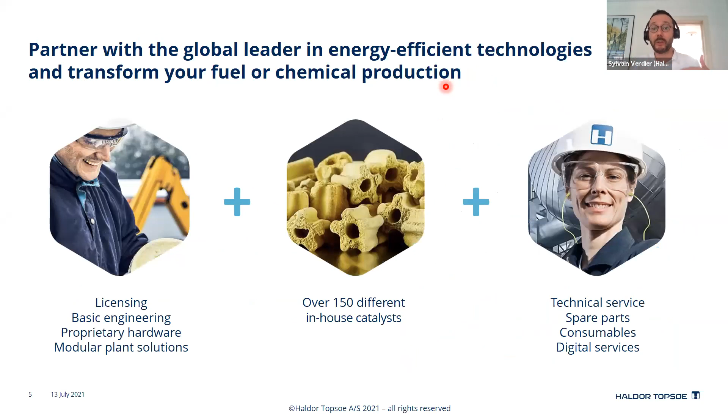And today we'll talk about one, which is how to produce biofuels. And we still have a lot of resources within R&D. Around 8% of our revenue is used for that. We do licensing, engineering, and so forth. A lot of catalysts.

Today we will talk about biofuels. Maybe we'll have another webinar at one point about hydrogen or green ammonia and methanol, all these other technologies and products we can help you with. But today, let's talk about biofuels.

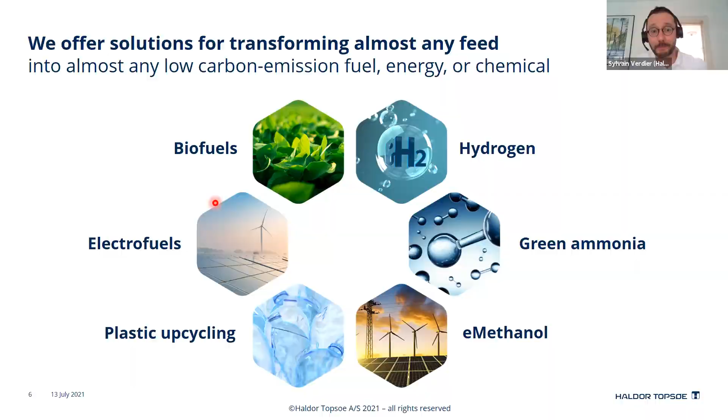If you're not familiar with biofuels, you will discover a whole world of acronyms and abbreviations. So I tried to summarize some of them to start with. You have what you might be familiar with, which is biodiesel or FAME, fatty acid methyl ester. You take, let's say, virgin oil, you do transesterification, and you get biodiesel. In Europe, you can blend up to 7%, depending on the country. You have different rules. Some countries like Brazil blend 20%, and some countries like Malaysia, Indonesia are talking about increasing to higher levels.

Then we have HVO or RD. HVO stands for hydrotreated vegetable oils. In Europe, that's how it's called normally. In the US, it's more called RD, renewable diesel. But let's say I'm using animal fat—will it still be called HVO? Yes, it will be. HVO is a generic name for when you hydrotreat or hydroprocess some fatty acid-based feedstock.

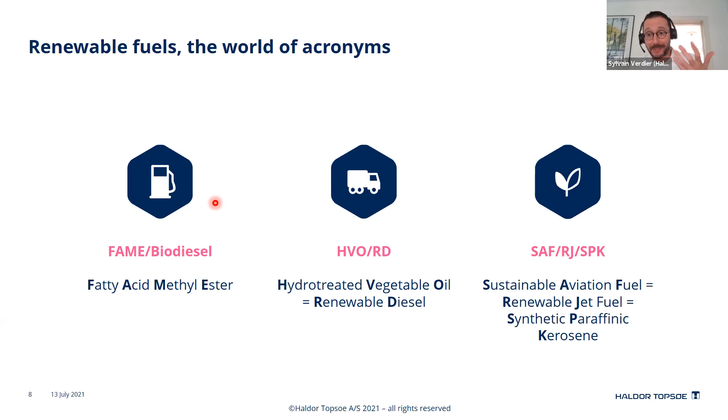The third set of acronyms we should look at is dedicated to jet fuel, renewable jet fuel. So one is SAF, Sustainable Aviation Fuels, RJ, Renewable Jet Fuel, and SPK for Synthetic Paraffinic Kerosene. I know it's a lot of abbreviations, but just wanted to start with this. For some people, HVO and biodiesel are the same. For us, it's quite different—one is a process of esterification, the other is due to hydroprocessing. So it's quite different conditions, hence different products. You might be familiar with this, but again, for those of you who are new to the world of biofuels.

For those of you who are experienced process engineers, you might think, okay, renewable fuels, it's a bit like fossil, I just need to process something else. It's actually a very different world. When I started, I worked about 10, 15 years on residue hydrocracking and so forth, so moving to renewable fuel was quite an interesting transition. The complexity is just different complexity. You not only have to look at technology, you have to look at the whole thing.

So the first thing is about feedstock, as I mentioned in the introduction. What is available, how much does it cost, where will it come from, and what is the quality, which is most important. You would get batches—maybe 50 tons or 10 tons or whatever you can buy—and each batch will differ. So can your unit process it? Will it make the same product? How will it affect the exotherm or hydrogen consumption in your unit? So that's quite different.

Conversion technology and cost: pre-treatment. A lot of these feedstocks contain contaminants such as phosphorus, silicon, chlorine from table salt, if it's used cooking oil, and so forth. So pretreatment will be needed. If you have a solid waste, you might want to transform it into a liquid, a biocrude, using pyrolysis or hydrothermal liquefaction, to name a few technologies. This is also a challenge. Hydroprocessing is important, hydrogen will be key, and CapEx, OpEx is obviously important.

The main challenge I see within renewable fuel is the whole market regulation world. We're moving toward a very regulated world in the EU for biofuels. EU, US, Canada, the UK - we spend so much time discussing legislation, blending mandates, greenhouse gas targets, because this is really what it's about. So as a process engineer, you might think it's not related to your work, but it actually will be. We spend a lot of time discussing this, not only with management or environmental engineers, but also with process engineers. It's really important.

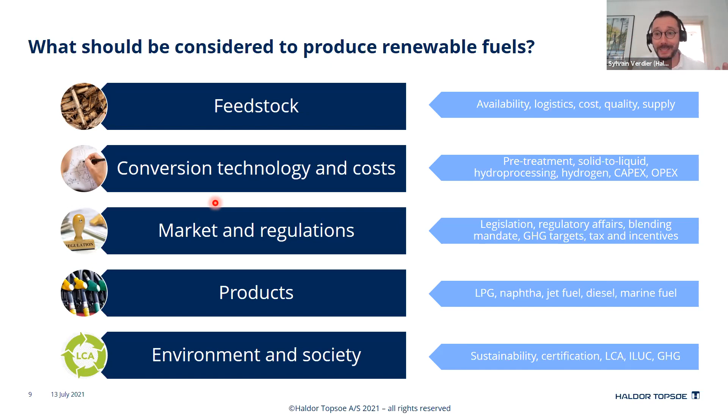So that was a quick introduction. Checking the time - so the agenda today, we'll talk about chemistry, as Fatima told you, challenges and solutions. Of course, we don't only want you to worry. A few words about sustainable aviation fuel, because the last couple of years was really about renewable diesel, especially in US and Europe, and now sustainable aviation fuel is really taking off. So I'll talk about that, then Q&A if time allows. If not, you can always write to me, or Fatima will follow up on the questions.

The main driving force, as Fatima said in the introduction, is mostly driven by legislation. So here I selected a few countries: RED 2 in Europe from 2021 to 2030, we had RED 1 from 2011 to 2020, RTFO in the UK, RFS at federal and state level in the US. Some states like California, Oregon, Washington State also have specific legislation on top of the RFS. Canada also has federal rules, and some states like British Columbia have something too. CORSIA for aviation - we're surrounded with legislation within biofuels. I will not bore you today about that, but that's really the main driving force behind it, and it's really important that every company looking into this masters it.

But let's talk about - we are chemical engineers, so this is what we should talk about today.

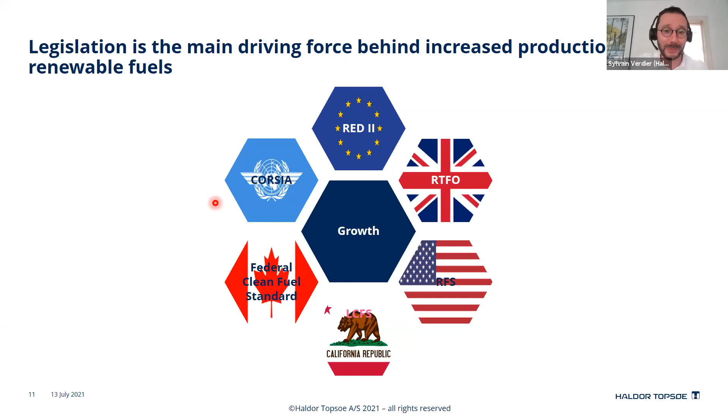In order to engage with you, we discussed with Fatima and decided we should do a few polls. So the first question I have for you: in EU 27, the 27 member states, what will be the share of renewable fuel in 2030? In 9 years from now, will it be 2%, 5%, 10%, 14%, or more than 20% with the current RED 2?

Fatima, I have a question for you while we wait, and I hope it's okay with you. Do you have a guess about what was the share in 2020 of renewable fuels in Europe? Are we talking about 5%? Yes? I live in the Middle East, so for me... I know, it's quite different. But okay, so I would guess it's still picking up. It has picked up, still picking up. So maybe between 5 and 10. Exactly. So, okay, spoiler alert for the answer, but we are around 10%, 9%, so it's average EU level. Some member states are below 5 actually, but some member states like Sweden, Finland, northern countries are much higher.

And it's binding for EU level, but not for each member state. So actually, okay.

And we can look at the answers. So right now, the target of the current RED 2 is 14% in 2030.

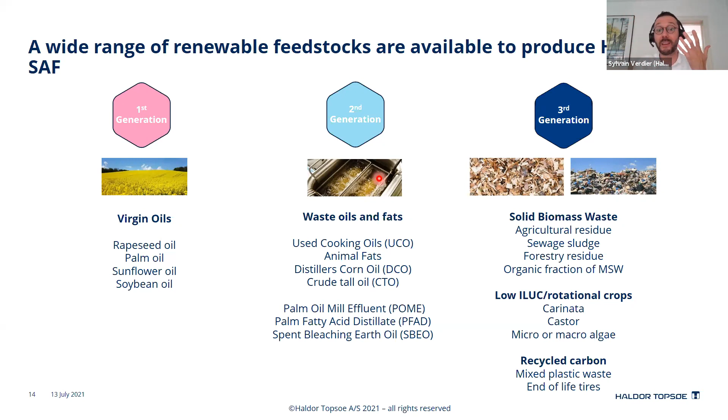So this is basically the feedstock you have, and they might have different chemistry, but we'll focus on virgin oil and waste oil and fats because they have very similar chemistry. Basically they mostly consist of triglycerides - you have a glycerol backbone, some oxygen, and then a long structure that looks like an alkane. We like alkanes or normal paraffins because this is what we have in fuels. Imagine you make diesel out of that - really high cetane number, cetane index, but very poor cold flow properties because it's quite high, maybe 26 degrees C, but it's really good.

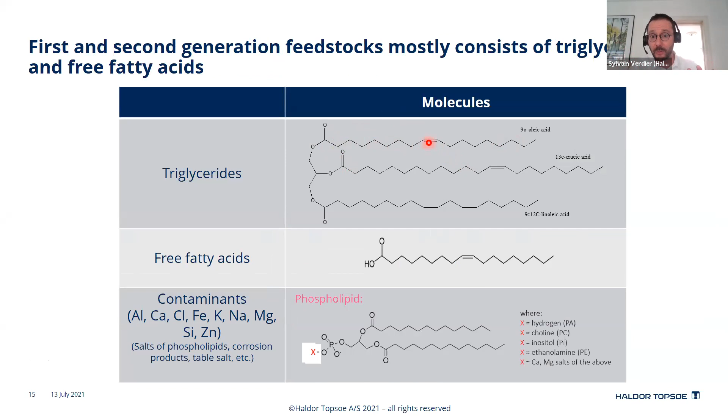Basically you look at your feed and say, okay, how many C16? This is 16 carbon, this is 18 maybe, and how many double bonds do I have? So here I have 1, 1, and 2. So when you buy your feedstock, you would get this type of fatty acid profile.

Let's say you have tallow, animal fat. Maybe you have 16 carbon with 0 double bonds, and you can have this amount, or maybe C18. It's actually quite interesting to know that because it will tell you what you will have in your product. If you make jet fuel, maybe you want more C16, it means less cracking. If you have more diesel, it's always in the diesel range.

But let's say you buy carinata, which is a winter crop. You have a lot of C22. Is it C22 or C24? I can see C22, yes. C22, and here this is above diesel range, so you will need cracking.

So basically, the number of double bonds will also affect your hydrogen consumption. So each feedstock batch will have a different fatty acid profile, but it will tell you which product you have, what is the quality, and how much hydrogen you might use.

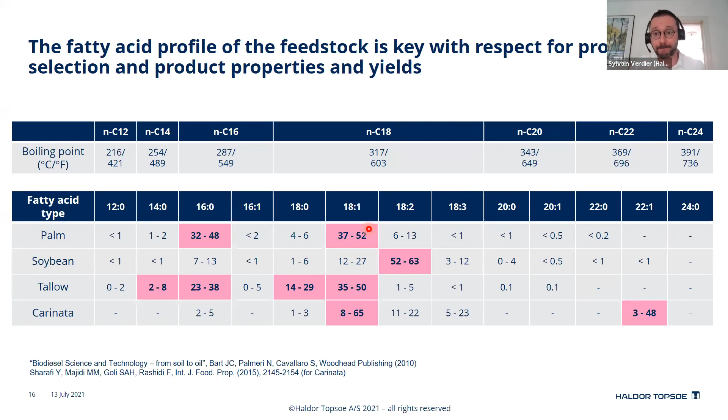So yes, time is a bit short. I speak too much. Okay, poll number 2.

Fatima. Okay, we talked about feedstock, the chemistry, but maybe you don't have an idea of how much volume is available out there. So the first question I have for you: if we forget food and feed, we don't care about using the virgin oils and the waste oil and fats, we have to use all of it to make biofuels. So we use all virgin oils, all waste oil and fats that I mentioned. How much renewable diesel do you think we could produce?

It's really a back of the envelope calculation I did last year. But what is the oil consumption now, Fatima? Are we around 95, 100 million barrels per day, the oil production? We're close to that, I think. 95? Yeah, around, I think so. I don't know. But basically, can we match that with renewable fuel? Will the world go fully out of fossil oil?

Okay, do you have a guess, Fatima? No? Well, we do have enough biomass in the world for sure. Yes, but are we able to utilize it fully?

Yes, exactly. And you mentioned municipal solid waste in the introduction, and that's really quite good because, okay, how are we doing with time? Okay, let's look. We're doing well, we're doing well.

Okay, good, perfect. But basically, I can tell you if we're just using virgin oils, we have around 170 million tons per year. That's not, but yeah, for renewable fuels, people don't think in barrels, they think in million tons or hundreds of thousands of tons. So 170 million tons, it's around 15-20% right now used to make biofuels.

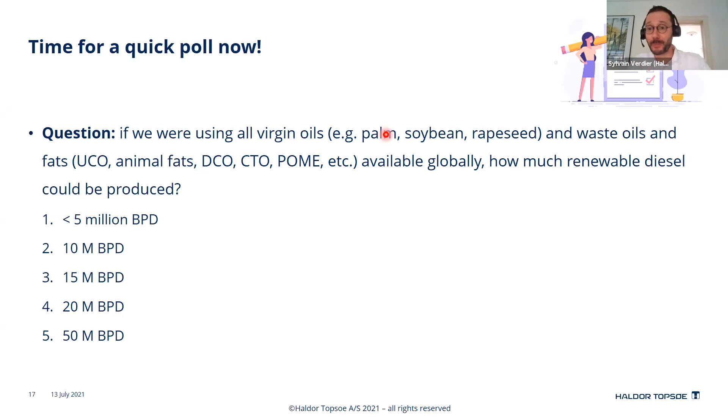But the first thing that goes is the propane backbone. So this will go, and you will produce a lot of biopropane. Actually, you can reuse it as a source - we have a process called H2Bridge where you can reuse it to make hydrogen. You send that to an SMR, for example. Or some companies are actually really interested in buying biopropane.

Then you remove the oxygen, but you have two routes. Either you produce water, which is the preferred route because you want the carbon to stay in the product. Or you can go the decarboxylation route, where basically the carbon makes CO and CO2 - or CO2 that then, with a reverse water gas shift, you have some CO. And then you can upgrade your product.

Let's say you want to make jet fuel - you need to crack, because you've seen the feedstock is above, you have a lot of diesel. If you hydrotreat your used cooking oil, you will have a lot in your diesel range, so you need to crack that. And you also need to dewax to improve the cold flow properties.

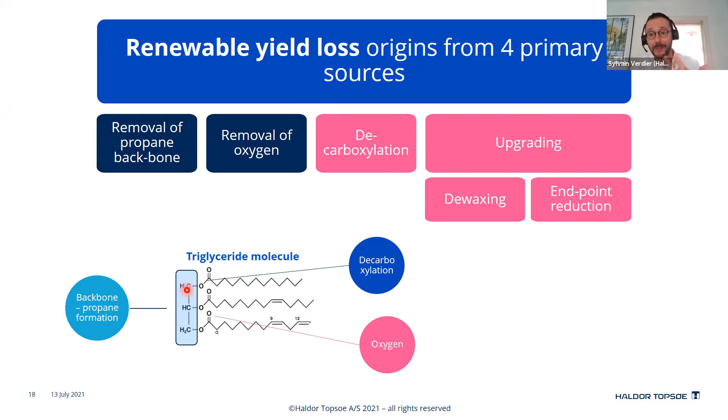I think I have a few slides about that - I'll go quickly, it might not be relevant if you're a student, but maybe if you work in a refinery it could be useful. So quickly, the first route is HDO: you produce propane, water, and then octadecane, and it stays. I never remember what is odd, what is even - but anyway, C18, C20, I think it's even number, stays; the carbon stays in the product.

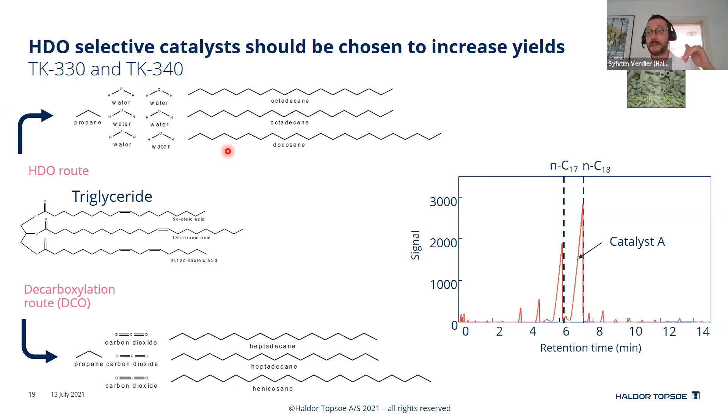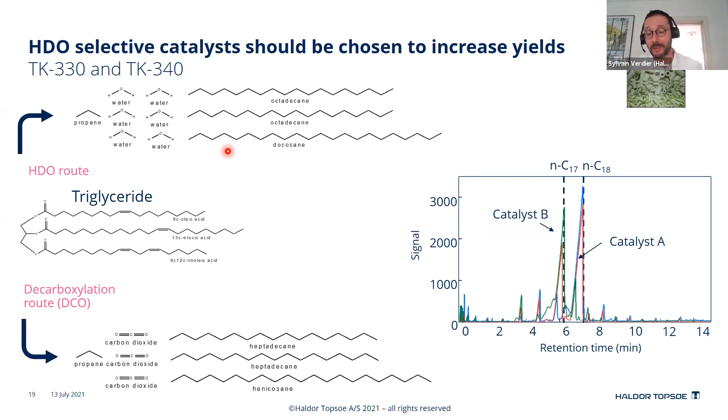Dewaxing, you make this beautiful normal paraffin, C18, it's very nice, high cetane index, we like that for the diesel pool. But the cloud point is actually not very good. It's too high, depending on where you use it. Let's say you want to export to Northern Europe, Russia, or cold places in the US.

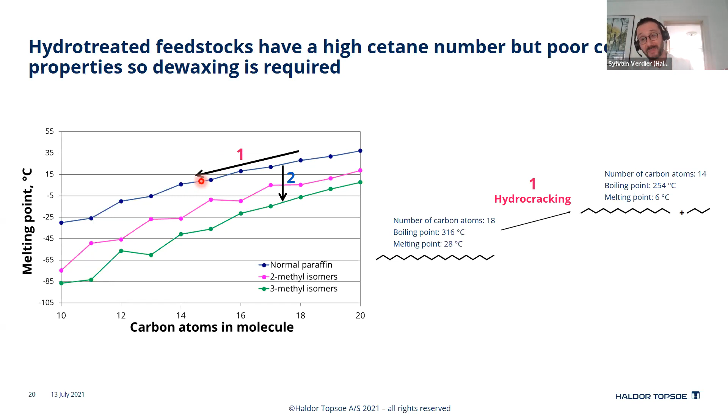Take an example of C18, melting point 28. Go the hydrocracking route, so I make some C4 and then C14, and here 6 degrees melting point, really good, but I lost butane. Or you can go the isomerization route, and here you also meet -6, and you stay within the same boiling range without any byproduct.

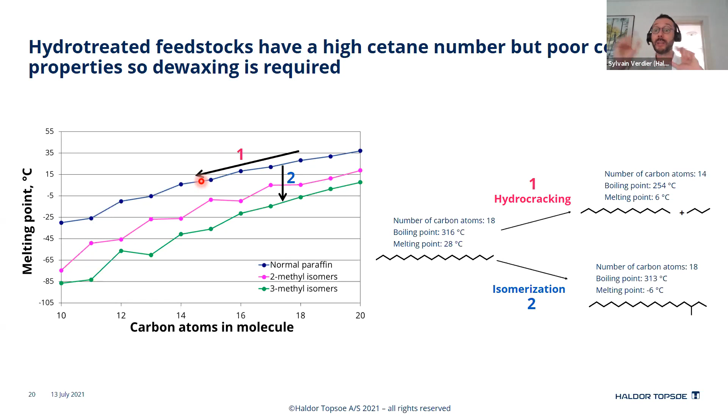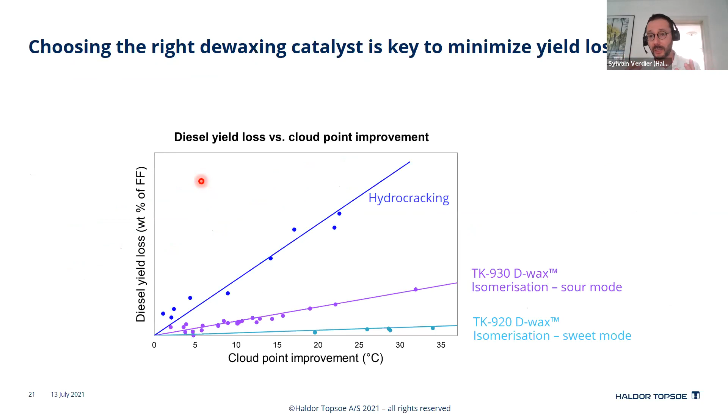By playing with the right dewaxing catalyst, you can choose this. Here, quickly, this is cloud point improvement versus diesel yield loss. We have different catalysts, sour mode, sweet mode, base metal, noble metal, you name it, depending on the configuration, but we have the right catalyst that can minimize yield loss.

Okay, Fatima, how are we with time? How much time do I have? We're doing well, we're doing well. Okay, cool, perfect, thank you.

Challenges. When you process this feedstock in your refinery, you will have some problems, I won't lie to you. It's not like fossil. Your units were not made initially for this. If you do a revamp or want to co-process, those units were not made to process such feedstock. So I listed 4 challenges.

Number 1, it's a very exothermic reaction. We don't talk about 50 degrees. Let's say you have 100% standalone, 100% renewable feedstock, maybe we talk about a delta T of 150 degrees Celsius. And because oxygen is very reactive, it consumes a lot of hydrogen.

So how do you handle this exotherm? What we say, we joke often, dilution is a solution. So either you can have some recycling, you can also co-process with a fossil feedstock to absorb the heat, or you can inject at different points. But basically you will have to deal with a massive exotherm, and also use a lot of hydrogen.

Hydrogen consumption, give or take order of magnitude, is similar to hydrocracking or higher. We're talking about 400%... I mean with 100% renewable, maybe 300, 350 normal cubic meter per cubic meter of feedstock. It is high. It depends on the feedstock, amount of double bonds and so forth, but that's the order of magnitude. So hydrogen is always a discussion we have with customers, hydrogen production, when we talk about such projects - do you have enough hydrogen?

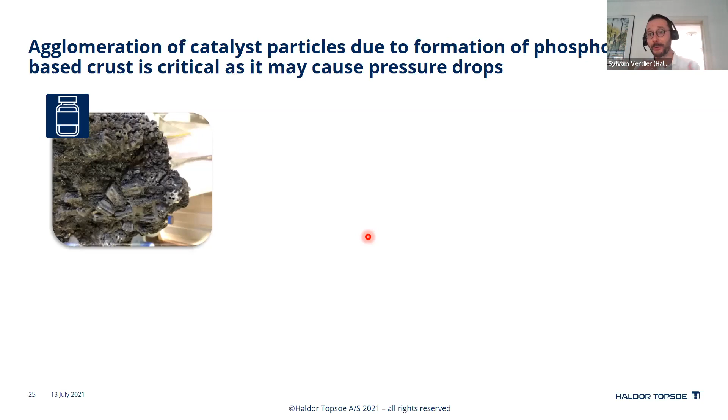Basically, you need to jackhammer this to unload your reactor. I don't know if some of you worked in re-refining or spent upgrading, but that's often a standard practice also because of phosphorus. Basically everything is glued together.

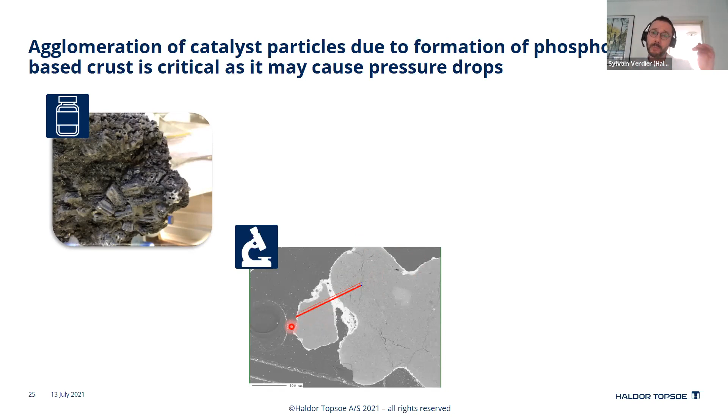So we did some SEM, scanning electron microscopy, of this. Here this is a catalyst particle and another one. Then with EDS we could basically look at the composition. So we followed that line and said, okay, what is it? What is this light gray particle?

We suspected it was phosphorus, and it is. Basically, this light gray area is mostly phosphorus, about 25% concentration. So it's a phosphate glass, and the other elements also stick to it—calcium, sodium, potassium, whatever you have will stick to that. It will bind the catalyst particles together.

And that creates pressure drops. We have a solution: a catalyst called TK3000 where you have full penetration of phosphorus, so we are solving this. The other solution is to have less and less phosphorus, but you will still have some. At one point you will either deactivate or have a pressure drop eventually. That's the nature of such feedstocks.

Last but not least, it's about corrosion. You have three types. First, acidic corrosion—let's say you have used cooking oil with a TAN number of, say, 25 acid number. If your metallurgy is not correct, you might have acidic corrosion.

Then you form CO2, so you will have carbonic acid corrosion. And if you have chloride—say, used cooking oil in your feedstock from table salt—you will have chloride-induced corrosion. Here material selection is key.

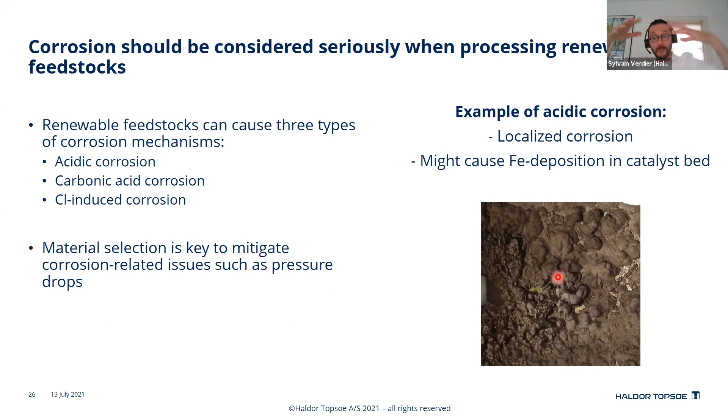So even when we do co-processing studies or revamps, the whole metallurgy study is really crucial because, of course, for pressure drops you don't want this—here's an example of localized acidic corrosion. Imagine this happens, it falls onto the grading of the catalyst, and then you might create a pressure drop. So that's really important. Okay, I will stop scaring you.

We obviously have solutions. So you are in a refinery and you want to co-process or process—what are your options? Option number one is co-processing. Let's say you are at a 5-10% co-processing rate. Here, it's a rough rule of thumb, but you could do it just with a different catalyst grading.

The idea is it's so exothermic that you need to control the exothermicity of these reactions. How do you do that? You start with a low active metal content, then increase so you can control this, plus more grading to handle contaminants. With a proper catalyst loading, you should be able to handle co-processing. Of course, you need to look at metallurgy, hydrogen consumption, and so forth, but that's just a rough example.

Number two, you might want to revamp. Some of the first units we revamped were at Preem in Sweden, in the Gothenburg refinery—we revamped for, I think, 30% co-processing. It was a tall oil diesel unit, around 2007. This is revamp: you look at metallurgy, all the pre-treatment of your feedstock, maybe installing a hydrogen unit, corrosion, and so forth. All of this needs to be studied carefully.

Option 3, which I see a bit less these days, is grassroots co-processing, meaning co-processing fossil and renewable together. It's also an option, but this is not something I have seen much lately. The other example, which we see most—co-processing is mostly European now, while standalone, 100% renewable, was mostly the US. Things are changing, of course, and these are general rules.

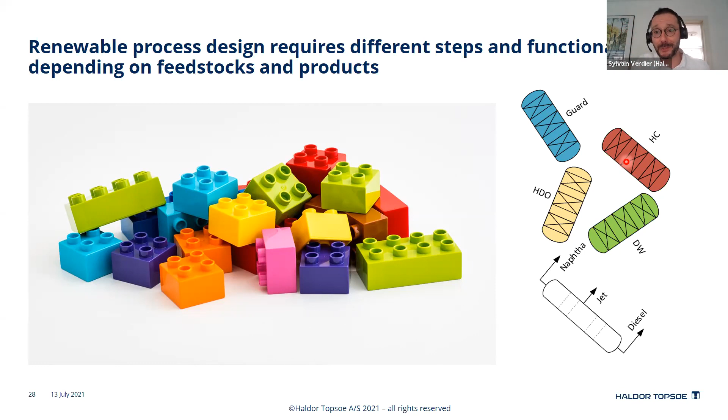So again, renewable naphtha, much more interest lately. The first units 10, 15 years ago, people were actually asking can we have less renewable naphtha. And now all the petchem industry is really very interested in buying this. Prices change, it could be similar price to HVO. So it's actually good money also to make with renewable naphtha. It's a good byproduct to have, and it can also be reused for other purposes.

Renewable jet fuel and SAF, right now very small amounts are produced, but more and more you might have heard about that if you are following the world of renewable fuels. HVO was big last year, and renewable jet fuel is really what people talk about these days. There will be a mandate coming in EU, possibly announced tomorrow too. The US is talking about it, and globally a lot of companies also said we want to fly with sustainable aviation fuel. And the last one, renewable diesel, HVO, of course has a future for it.

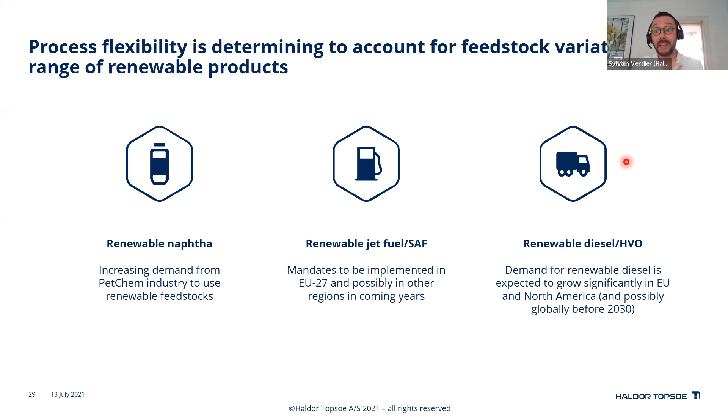We know that light duty will be electrified, likely, it's a matter of when to some extent. But also heavy duty is not likely to run on batteries. So there will be a big demand for HVO until 2030, and we expect it to continue increasing. So basically, you have these different products you might have, hence the process flexibility I mentioned.

Fatima, how are we with time again? I think we'll have to speed it up a little bit.

Yes, I'll go quickly. Last poll for you. In EU 27, so 27 member states, what will be the share of renewable jet fuel in 2035?

Fatima, do you know how much? It's not a trick question. You might not know because I don't know how much you follow renewable fuel. But do you know how much renewable jet fuel is produced now, like globally? And it's okay if you don't know, I don't want to trick you. I'll stick with my favorite option, 5 to 10.

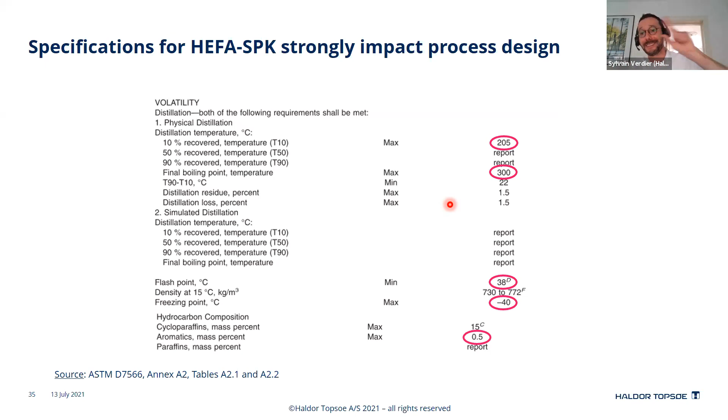maximum 0.5% aromatics. You might actually form aromatics in your process if you don't control your heat properly, so that's a really strict specification. And interestingly, you need to blend with something that has at least 8% aromatics. So it's a bit of a contradictory specification somehow.

This is an example of how to maximize production, and you'll see the process layout quickly. This is the feedstock you have—a mix of 50% tallow and 50% used cooking oil. You see the fatty acid profile: a lot of C16, C18 with 1 or 2 double bonds.

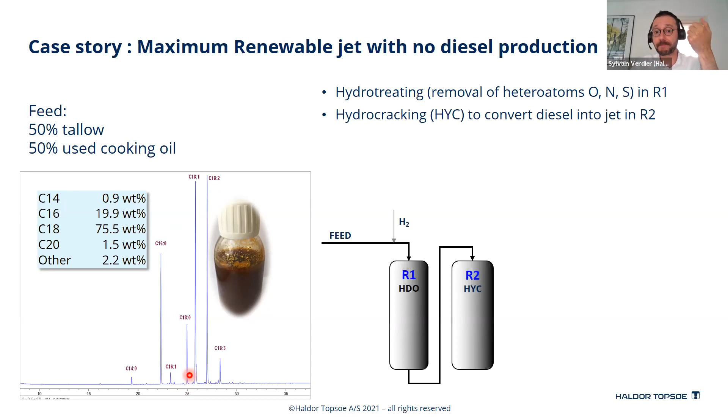So which process could be chosen? This is just an example—there are many different layouts—but the first reactor here was basically an HDO reactor to remove oxygen. The second one was hydrocracking, then we had some stripping. It's similar to a 2-stage hydrocracker.

Then you separate your naphtha and your kero, and you send your kero to an isomerization reactor in sweet mode with a noble metal catalyst. And here you meet on-spec renewable jet fuel meeting the D7566 specification.

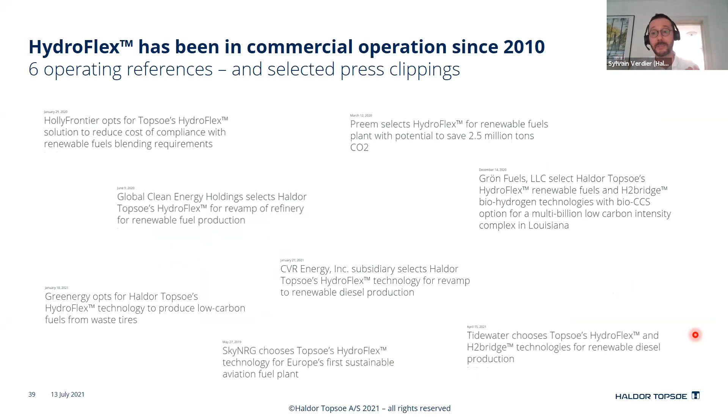Okay, last one, Fatima, then I'm done. We have 6 units, 6 running references. I didn't want to make it too commercial, but I still wanted to show—we started in 2010, and then we announced a lot of units, which is really good. It's happening globally, with a lot of types of feedstocks, and yes, that's what I had to say.

Yes, Fatima, I can't see the questions, but are there any questions? Oh, there are questions, there are questions. Okay, so if you'd like to summarize with this one.

This is more for later, for the conclusion, but I'm happy to answer a question now.

So perfect, we do have some technical questions, detailed technical questions, and I can see that most of them are with regards to feasibility. But let's start with the first technical question. So a question from Muhammad: he asks, what would happen upon TK 930 catalysts?

Would heteroatom C bonds only break down, or would CC bond degradation occur too? I mean, would hydrocracking be significant? Yeah, but TK 930 is not a hydrocracking catalyst, it's an isomerization catalyst due to the zeolite it contains. So it's mostly isomerization, with a bit of yield loss due to minor cracking, but no real hydrocracking with TK 930 or 920, even less so. If you want cracking, we have a hydrocracking catalyst, and if you want to make jet fuel, we could do that. But if you just want to isomerize your diesel, we have 930 in sweet mode, sorry, sour mode with base metal, and sweet mode with noble metal. Both are commercial and have been running in many units for some years. So I hope that answers your question, Muhammad. Moving on to the next one.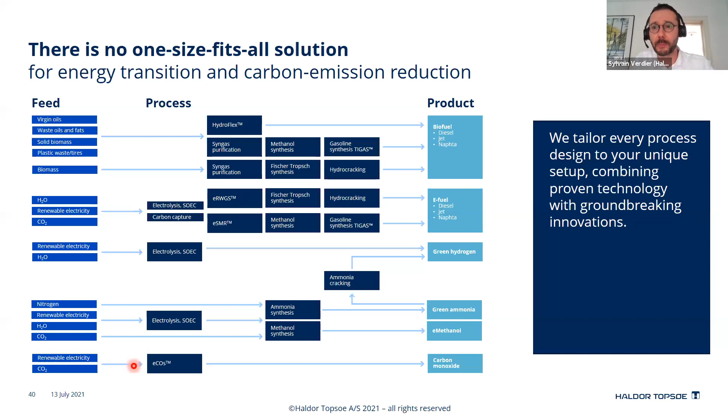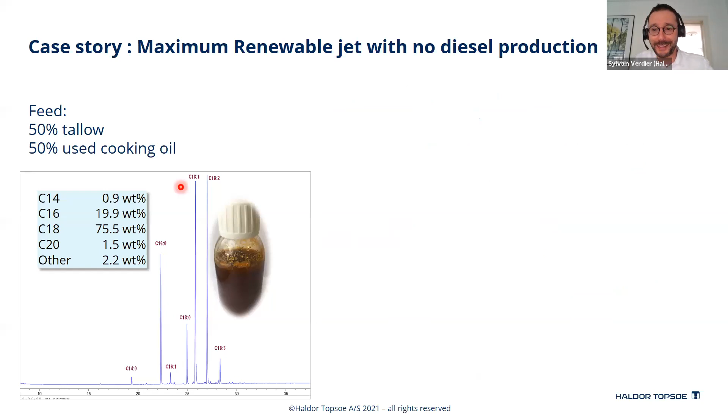Co-processing 10%, should we expect hydrogen consumption to be higher or lower than normal? Higher, for co-processing. Each percent, I think I had this graph about... okay, let me go back to it. Sorry, but yes, you will increase by, what was it, around 20% more. Sorry, I have too many slides, that's my fault. For every percent of renewable feedstock you use, due to the oxygen content, you will use more hydrogen. So that's how it is.

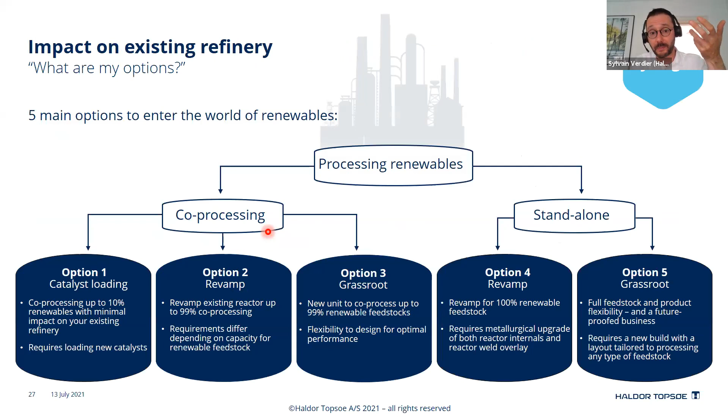Let me find it. Sorry. Yes, so maybe with 10%, you're around, okay, it depends on the amount of double bonds you have in your feedstock, but maybe with 10%, you're around 25, 30, 40% more hydrogen. So you're going to consume more hydrogen for sure, due to the oxygen and the double bonds. So hydrogen has to be available. Hydrogen, yes, you need hydrogen. If you are short of hydrogen...

As I said, we have this process called H2 Bridge, where you can recycle renewable naphtha and bio-LPG, send it to a steam reformer to make more. So you make some green hydrogen based off that, but that's a way to minimize your emissions. Otherwise, you will need more hydrogen. Also why we see a lot of projects using green hydrogen, or you will need a lot of hydrogen.

Another question again from Ali: what are the current unit licensors and catalyst suppliers for this new technology? I cannot talk about the competitors. Good question, I can talk about Topsoe, then you Google the rest, yes, and you have a few licensors. We, I don't want to be arrogant, but we're doing well within this segment. No, but really, we have big success, we were some of the first runners.

In Scandinavia, we're lucky enough to design the 100% unit with UPM in Finland. So we have a lot of units that have been running for many years. And in the US, if you check our blog you would see some of the press releases. We can maybe announce just the top of the iceberg of the project, but it's very global. It started EU and US, and now it's really spreading, and it's going to grow. Google, Google, and now you can see who are our competitors. Topsoe, yes.

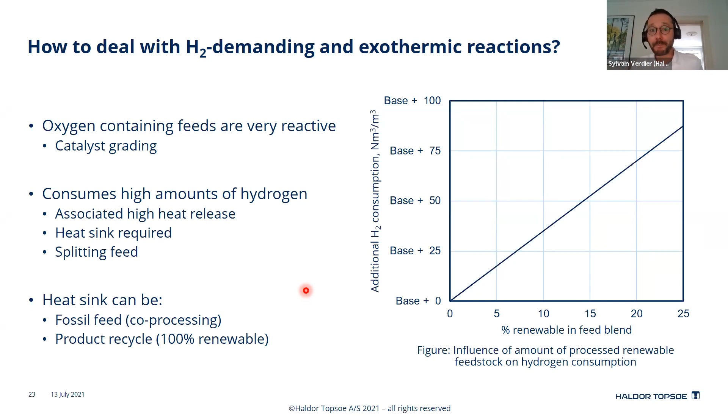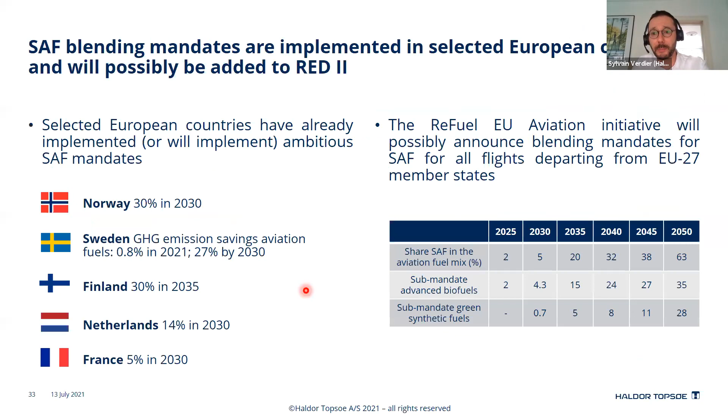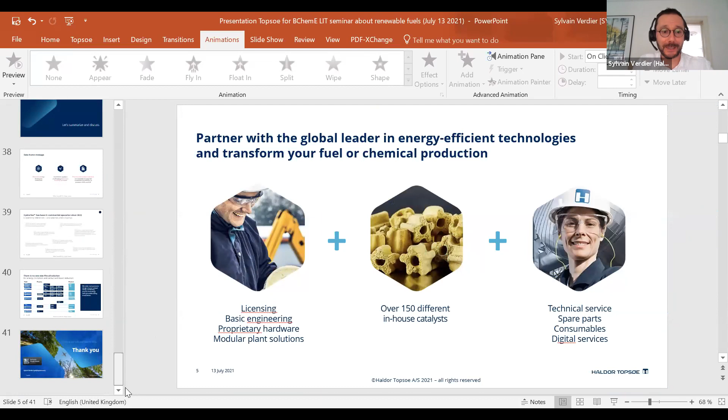Oops, sorry, it's gone. I don't know what you can see now. Yes, apps. Yes, and no, you don't see. Yeah, I cannot go back.